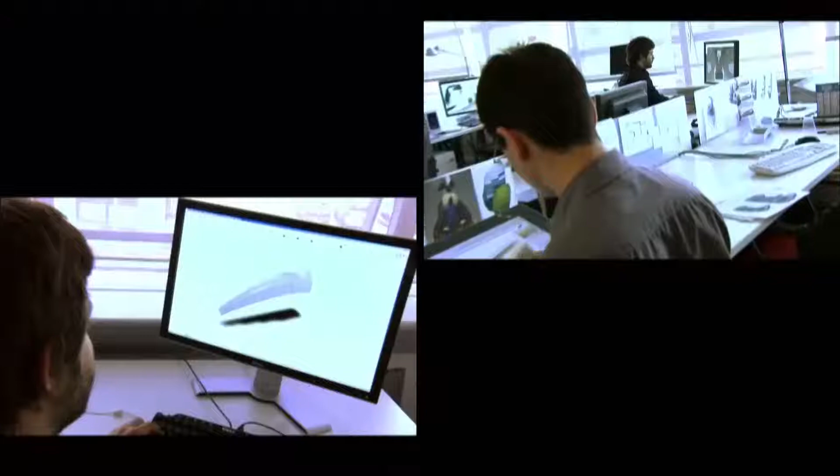Attentively devote to the professional research and development. Persist in unique development and creation. Sanyi, a company, develops firmly in its creative way.

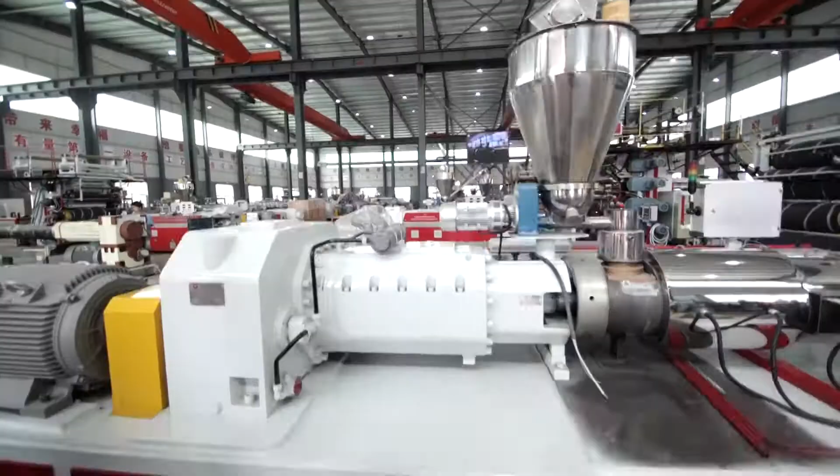Technology brings advantages, and talent promotes the development. In 2007, our company developed the PVC foam board extrusion line, which was the most successful line in China at that time, and it still works smoothly now.

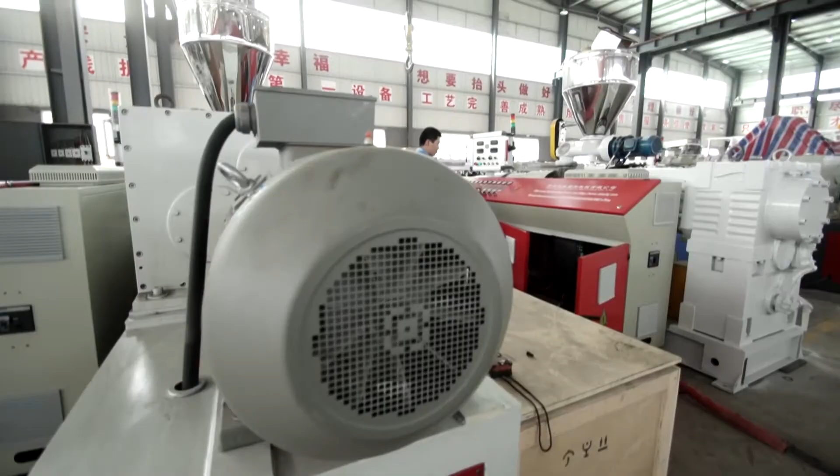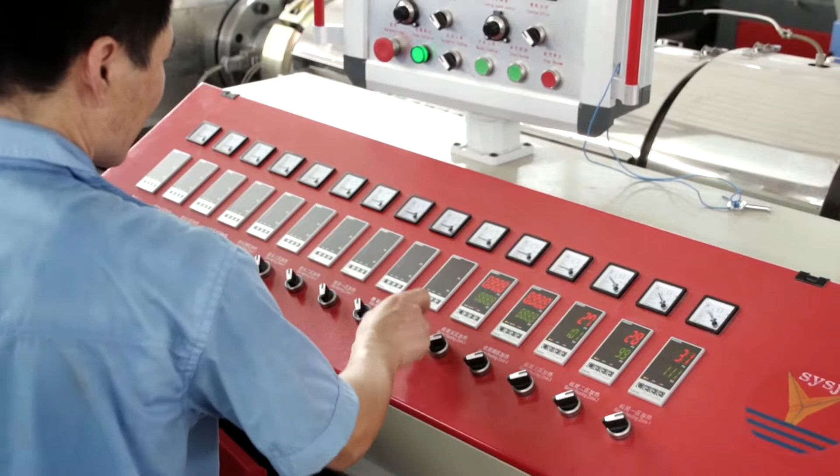Since then, Sanyi Plastic Machinery Company has kept its professional way towards developing PVC foam board extrusion lines. After 10 years development, our company successfully developed the 14th generation line, 80/173, with a capacity of 500 to 600 kilograms per hour. This line is a creation in China.

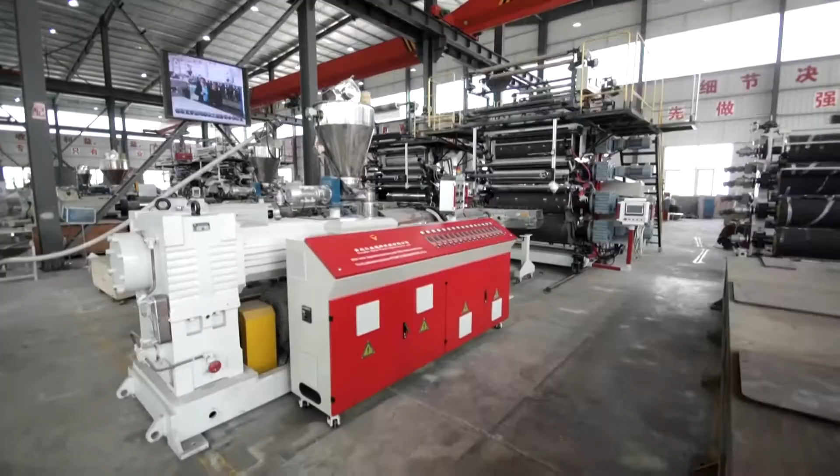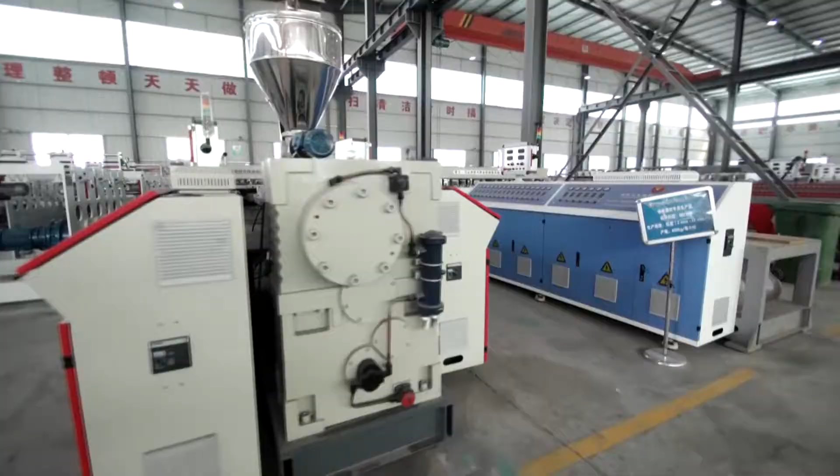In 2016, the SPC floor extrusion line was developed, and the WPC PVC one-step foamed flooring extrusion line and WPC foamed SPC flooring co-extrusion line were developed in March 2017. We've successfully patented several of our lines.

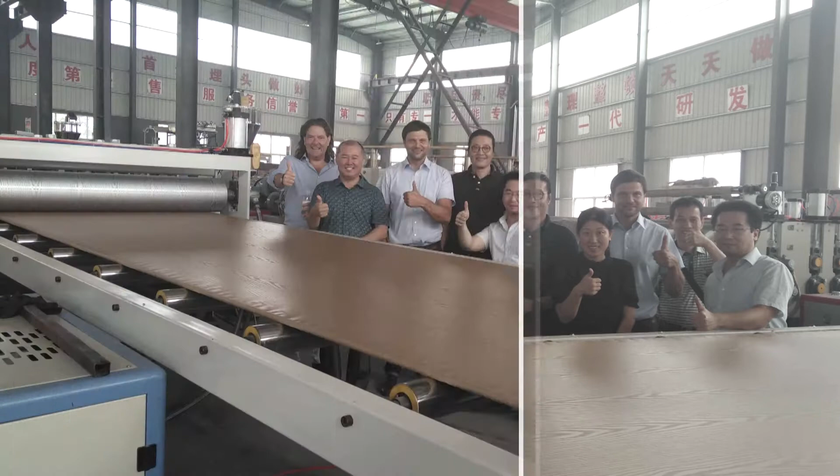In April 2015, Mr. Reber from the leading plastic enterprise, Krauss Maffei, visited our company to discuss the cooperation affairs. Mr. Reber stressed that Sanyi is their only cooperator in China for such a kind of production line. After 2 years negotiation, we've reached the initial cooperation intention.

Until today, in China, about 1/3 of PVC crusting and foaming producing lines are from Sanyi, and they are even exported to overseas countries: Romania, Germany, Russia, Uganda, Kuwait, Iran, Iraq, Egypt, India, Pakistan, Tajikistan, Thailand, Vietnam, Myanmar, Indonesia, Korea, Malaysia, and other regions. This brings high reputation to Sanyi both at home and abroad.

The chairman, Zhou Yuliang, holds a number of positions in various associations and special committees. Now, he is Managing Director in China Plastics Processing Industry Association, Executive Vice President in PVC Crusting and Foaming Special Committees, Deputy Secretary in China Formwork and Scaffold Association, Vice President in China Plastics Formwork Development Alliance, Social Director in Association of Veteran Scientists and Technicians of Tsinghua University.

Sanyi is picked as a leading company for its industry regulation by State Bureau of Light Industry and the Statistical Data Acquisition Unit for Formwork and Scaffold Industry.

In May 2016, our company was chosen as a research and development base for Qingdao University of Science and Technology and was awarded the High-Tech Enterprise and Qingdao Famous Trademark. Moreover, we've successfully undertaken and assisted in various forms for several associations.

SPC floor extrusion line, including mixing system, extruder system, calender with online print film and wear layer laminate device, haul-off device, shear cutter, and automatic stacker robot.

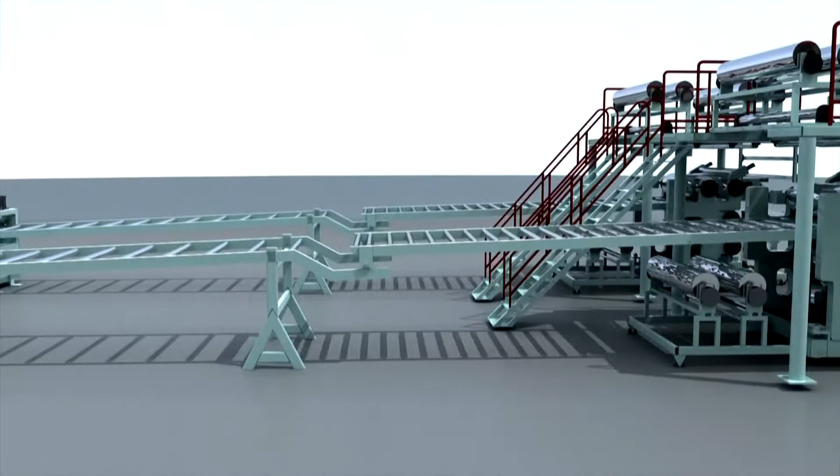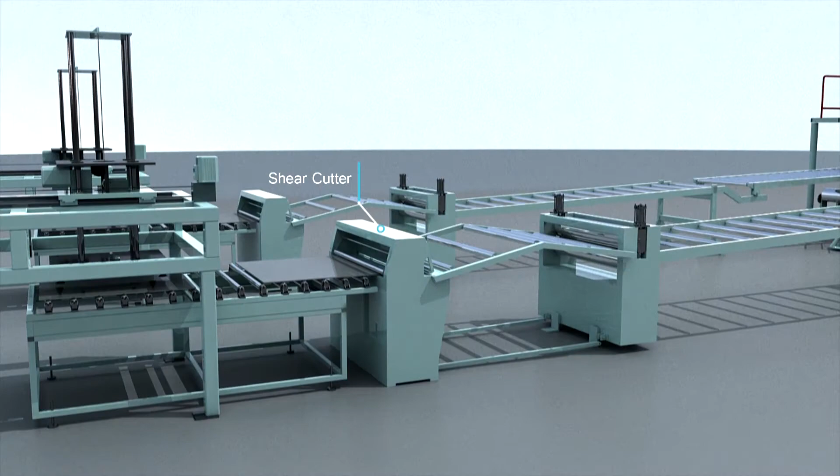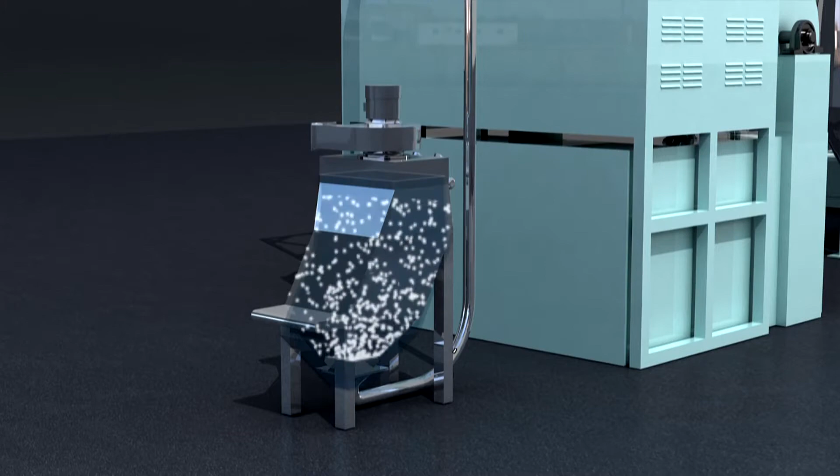Mixing system. Firstly, the material needs to be put into the feeding machine according to the formula ratio. And the material goes inside the mixer through the material loading machine.

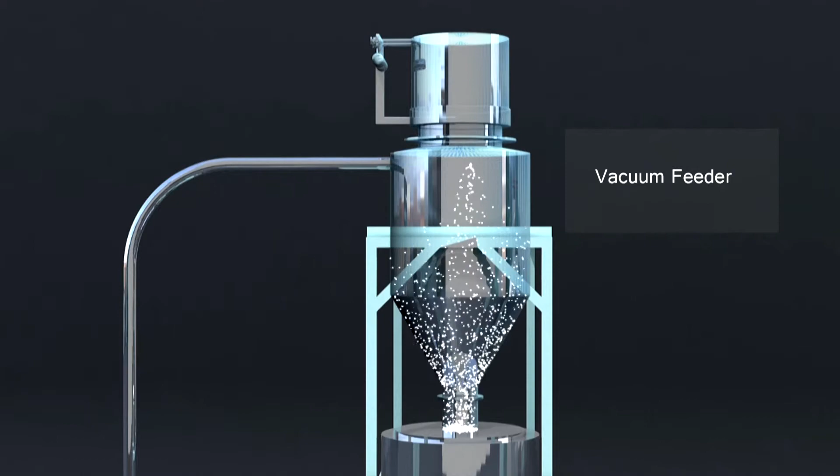The material is mixed at a high speed through the friction heating principle, and the temperature is raised to 115 degrees Celsius to 120 degrees Celsius. The material is evenly stirred, and the water gas is removed during mixing.

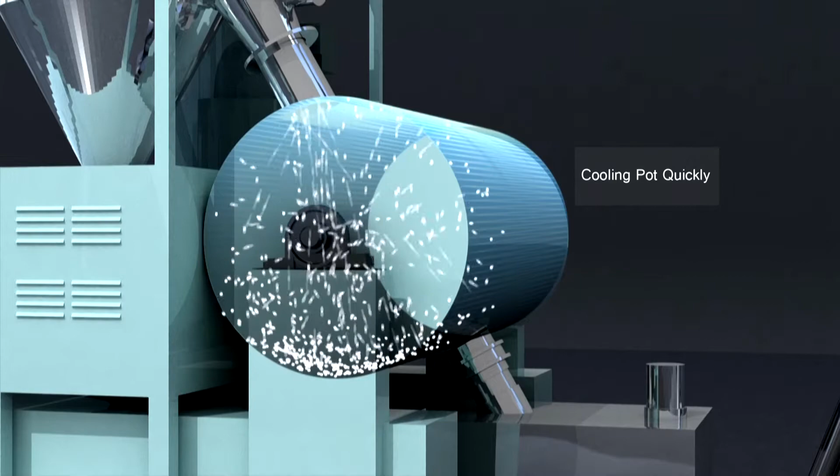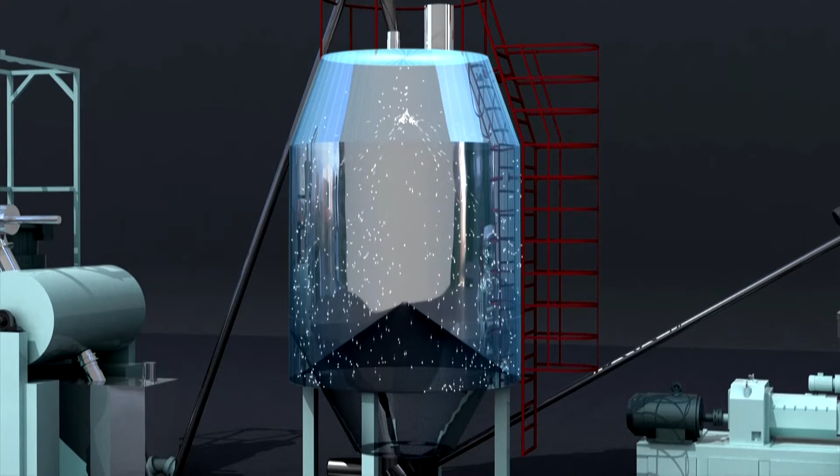After reaching the use requirements, it will be automatically discharged into the cold mixer, preventing plasticization and decomposition in advance, then rapidly cooled to about 45 degrees Celsius, and then discharged to the silo, and the discharged material will enter the twin-screw feeding system through the screw feeder at a constant speed.

Then the twin-screw feeding system evenly transports the material to the extrusion system, and after heating and plasticizing, temperature control is the most critical link in the process.

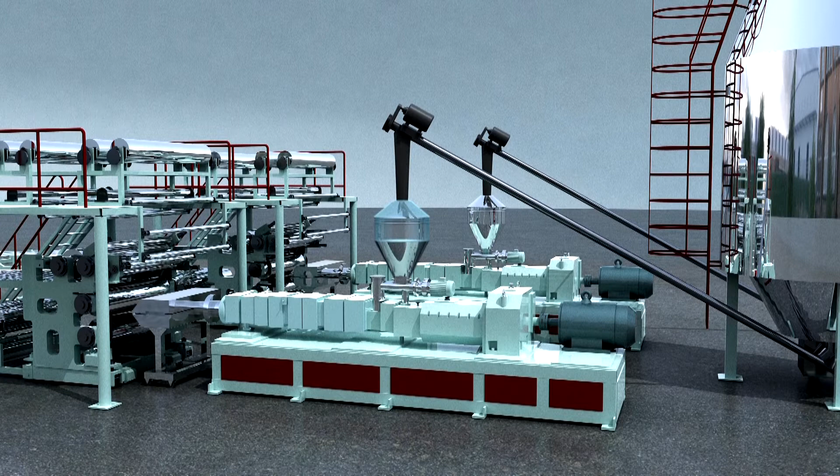The heating and heat dissipating output is controlled by the temperature control module, and the high-precision K-type thermocouple temperature measurement completes temperature control. After the material is heated to melt, it is rotated by the screw to generate a strong pressure and then extruded into the mold. The product specifications are determined by the size of the mold.

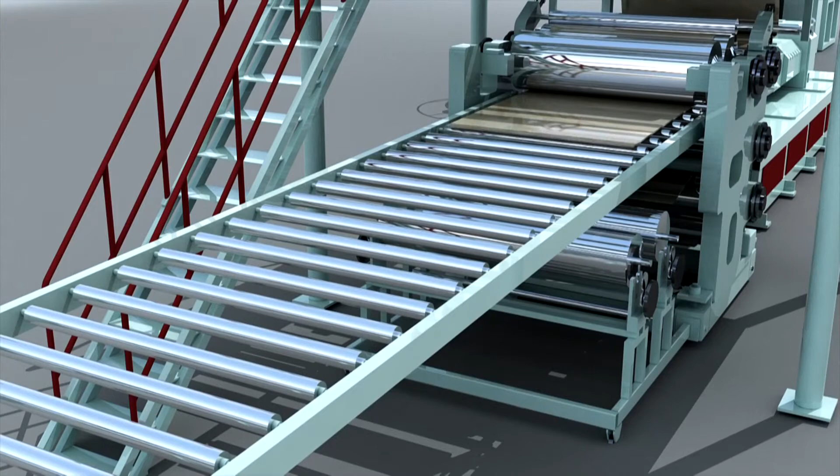Calender with online print film and wear layer laminate device. After the embryo emerges, it enters the calender. Firstly, it is pressed by first and second mirror rollers to ensure uniform thickness.

Then the print film and the wear layer are bonded online by its own temperature and roller heating. Then embossing and an automatic correction system is adopted to ensure that the unwinding line is not offset, thereby greatly improving the quality.

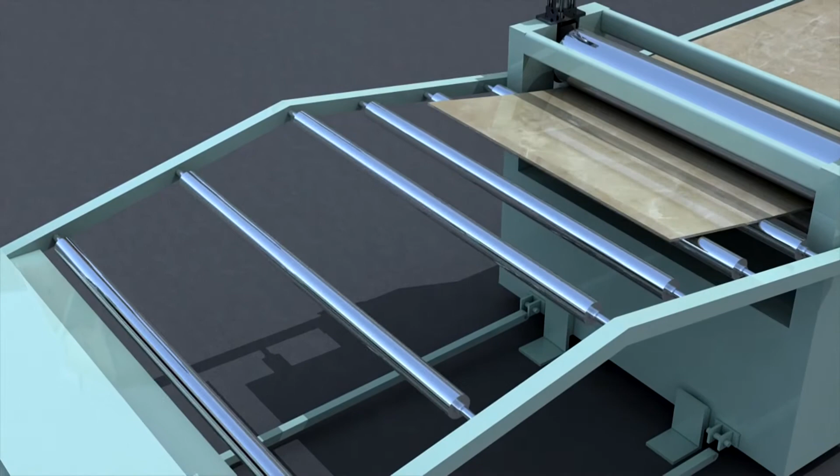Haul-off device. Installed with Germany imported Siemens Top Series inverter speed control, it can perfectly match the production line speed.

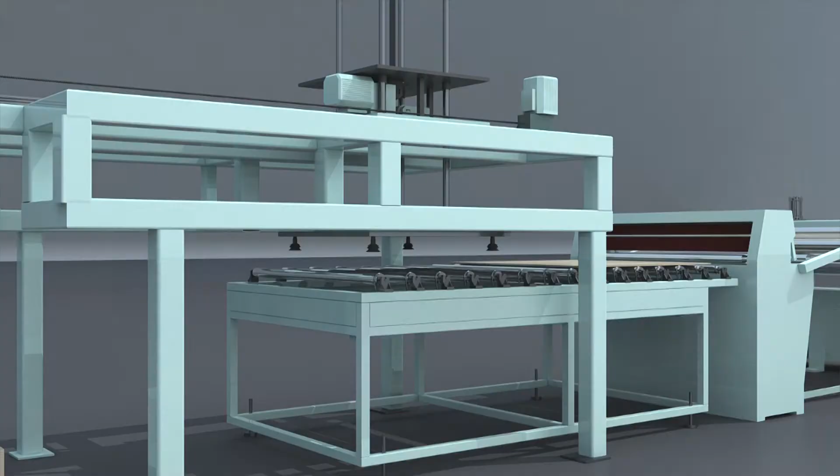Sheet is conveyed by the haul-off to the shearing machine for cutting. The cutting length is set by the sensor switch, which is sensitive and accurate in length control. Automatic stacker robot: the finished sheet after cutting is completed by the robot.

Electric cabinet system. The main motor and inverter adopt German imported Siemens Top G120 series. AC contactor, breaker, including large breaker, relay and switch, German import, all adopt German authentic Siemens. If German Siemens can supply, we will import from Germany. If they cannot supply, we will buy from Siemens China. If Siemens China cannot supply, we will use other international famous brand.

The temperature meter is from Japan, Omron. The relays, the travel switch, etc. all use France Schneider.